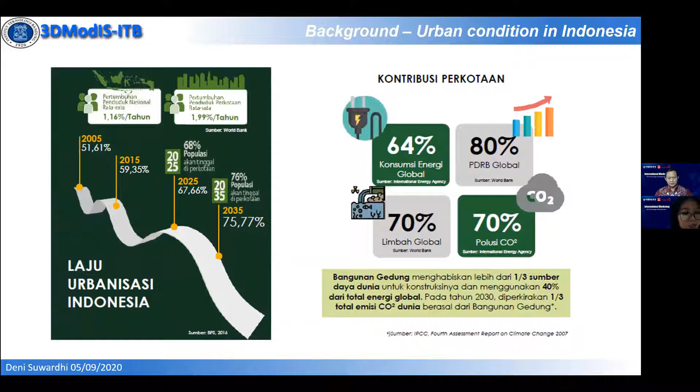Before we go to the HESTYA research project, we have to talk about the background of urban conditions in Indonesia. In urban settings, buildings represent one of the most important elements. Building construction requires more than 40% of global energy requirements. In Indonesia, this has become more evident with the ever-increasing rate of urbanization. We can see in the picture on the left the increasing rate of urbanization in Indonesia. In this regard, a sustainable strategy for city building and planning is very essential.

One of the most important pillars—there are 9 things essential for sustainable urban development, but one of the most important pillars of such a development strategy is the availability of accurate data. Urban management planning includes urban service provision planning in accordance with urban service standards, and planning and setting strategic aspects in urban management.

This includes, but is not limited to, urban zone planning, like the regional spatial plan. In Indonesia we call it RTRW, Rencana Tata Ruang Wilayah, and the detailed spatial plan, Rencana Detail Tata Ruang, as well as zoning regulation, residential area plan, and residential environmental plan.

Now about technology and smart city. As we know, a smart city is a city that takes advantage of advanced digital technology, or information communication technology, to improve city performance. The concept of smart city has been proposed in past experience to help manage these issues. In a sense, the smart city is based on various digital technologies, all used to increase city performance.

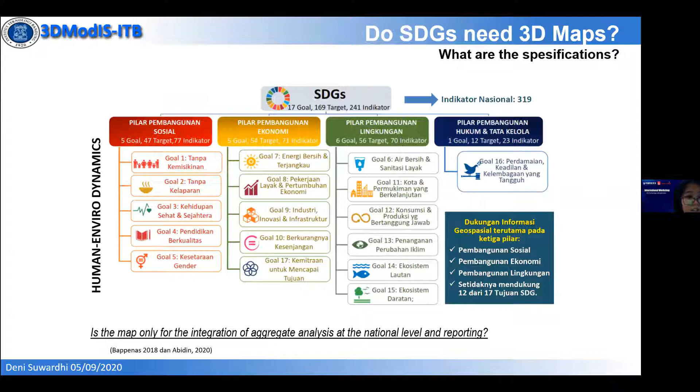We can see from the 17 goals in SDGs, there are national indicators—319 of them.

In this slide we can see the human-enviro dynamics. Here we see SDG 11 is to provide essential urban services, and another target concerns the issue of planning. On the issue of planning, the UN Fundamental Geospatial Data includes not only 2-dimensional, but also 2.5-dimensional and 3-dimensional geospatial data.

We can see this in the document of GGIM.

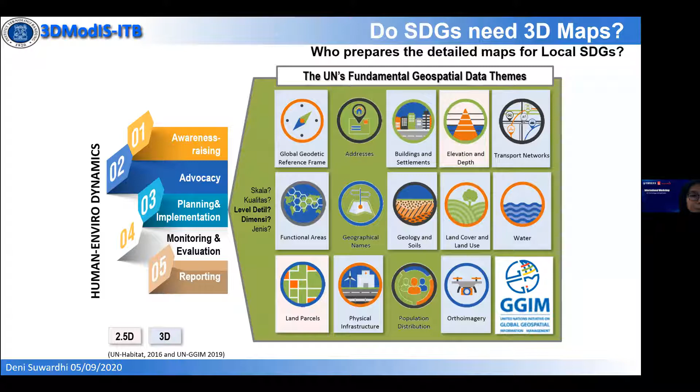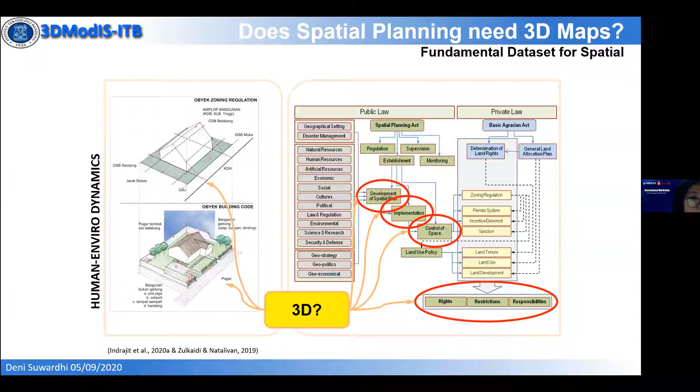Spatial planning needs a 3D map as fundamental data. We can see this in both public law and private law. In public law, there's development of spatial plans and implementation and control of space. In private law, there's need for right restriction and responsibilities with 3D maps, because there's objects like zoning regulation and building codes that need 3D maps.

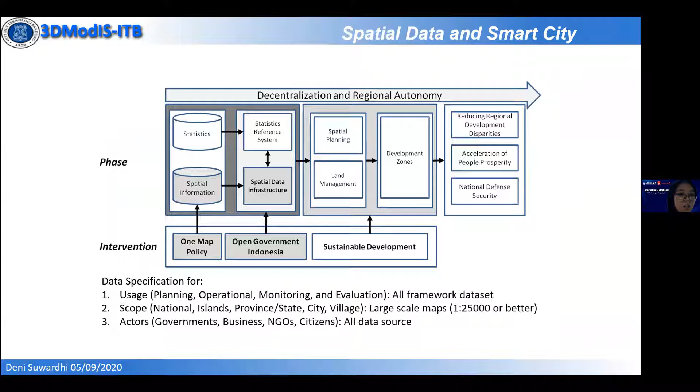It's also more specifically about improving sustainable city planning using 3D data. The data specification for usage, scope, and actors can be seen in the phase and intervention. There's a one-map policy for spatial information and spatial data infrastructure, so decentralization and regional autonomy can be implemented.

From those issues, we have to find solutions. We argue that the recording of 3D geospatial data will become inevitable in the future, as can already be seen in several countries.

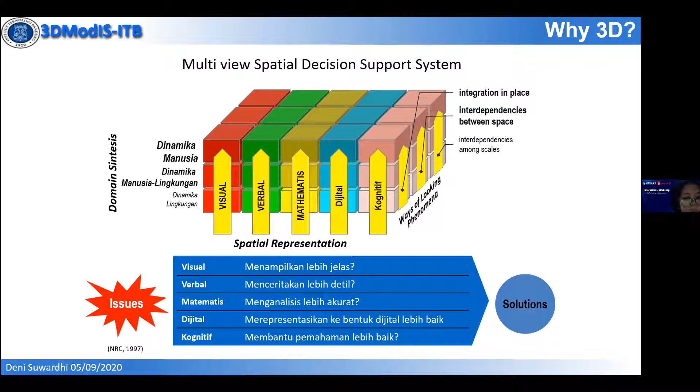With the use of 3D data, standardization to ease business permits can also be initiated. This would streamline the process and thus facilitate business owners dealing with construction permits, getting electricity, registering property, and paying taxes. This is data standardization for ease of doing business.

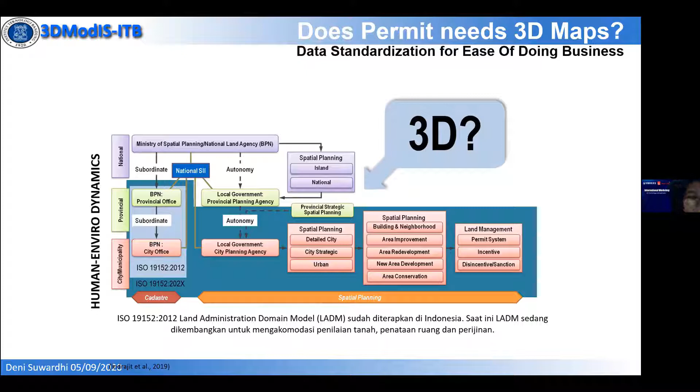Land administration domain model has been implemented in Indonesia, but now LADM is still being developed to accommodate permits, city planning, and management like that with 3D. It's one example of why permits need 3D maps.

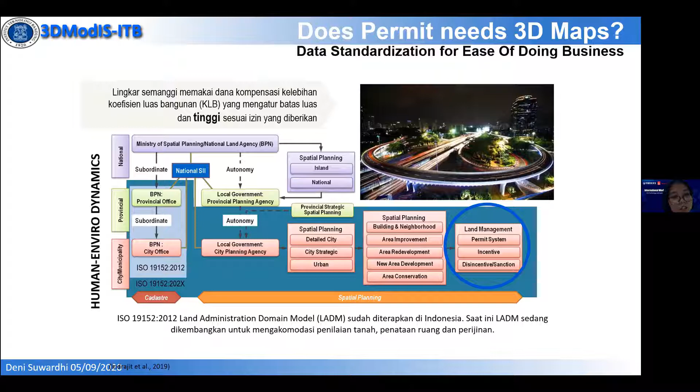It's the Semanggi case in Jakarta, using the compensation fund and using the koefisien luas bangunan (KLB), and then the fund using the regulation about the area and height of building from the regulation.

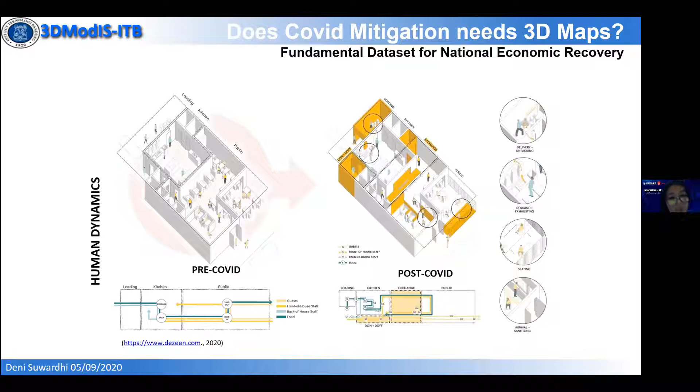This type of spatial planning can be implemented digitally and more efficiently. The left picture is pre-COVID and the right picture is post-COVID. Before COVID, we can see there's no yellow area. The yellow area is the exchange area because of COVID mitigation. It shows pre-COVID, lockdown, and post-COVID.

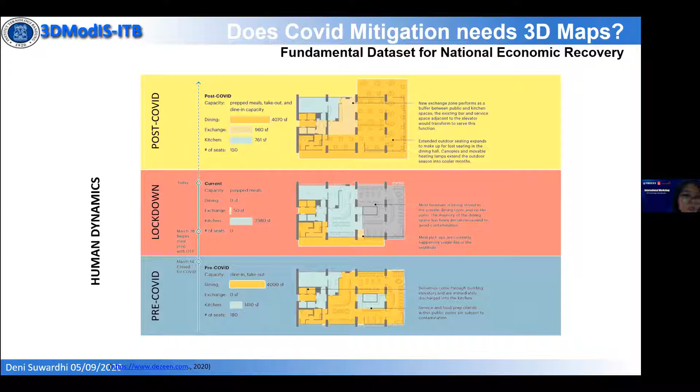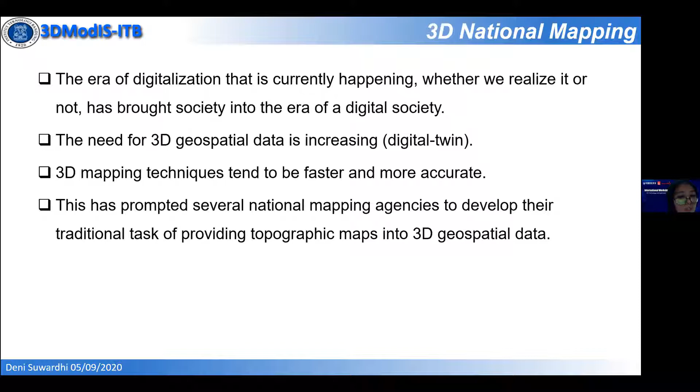In the research from Stoter, it's Switzerland's Federal Office of Topography, SwissTopo.

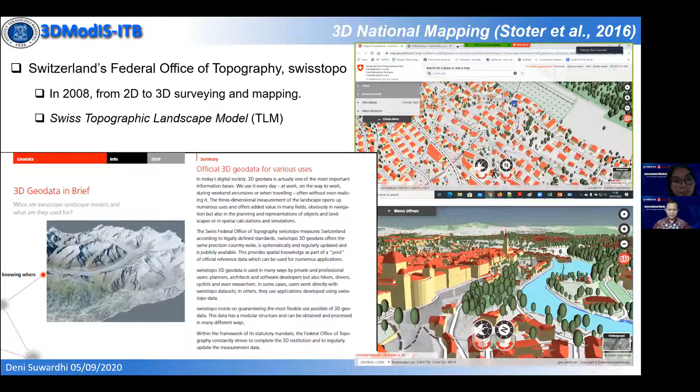Amongst others, the use of laser scanning, photogrammetry, SAR, etc. This is, I would like to tell about the 3D model.

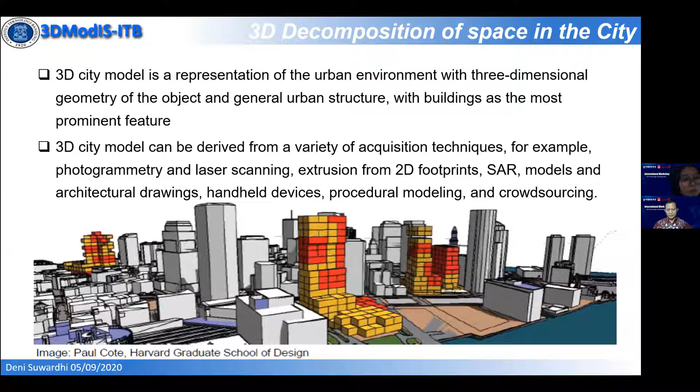It is a representation of the urban environment with three-dimensional geometry, but building as the most prominent feature. A system called GIS, Geographic Information System, enables the storing of both geometric and semantic data in a single environment. The system manages the data and can be used to perform analysis and modeling in 3D GIS, stores and manipulates 3D.

It is a 3D geometric primitive built in GIS software and designed with a specific 3D modeling software. And then one of the standardized frameworks for GIS is the CityGML, City Geography Markup Language, which deconstructs geometrical features into several levels of details.

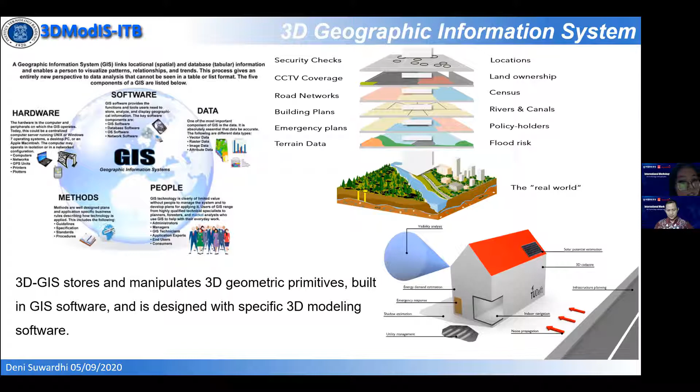It is the level of details in the OGC CityGML and the version of TU-Delft. In the OGC CityGML version, there are the LOD 0, 1, 2, 3, and 4. The difference is in LOD 0, it's only a plan, 2 or 2.5 dimension. And in LOD 1, it's...

visualizing the building mass. And in LOD2, we can see the form of the roof, but it's very simple. And then in LOD3, we can see the more detailed roof. And in LOD4, it's the detail for the interior.

But in the version of TU-Delft, they create another version that's more detailed than OGC CityGML. There are levels like LOD 0.0, 0.1, and so on. It's more detailed.

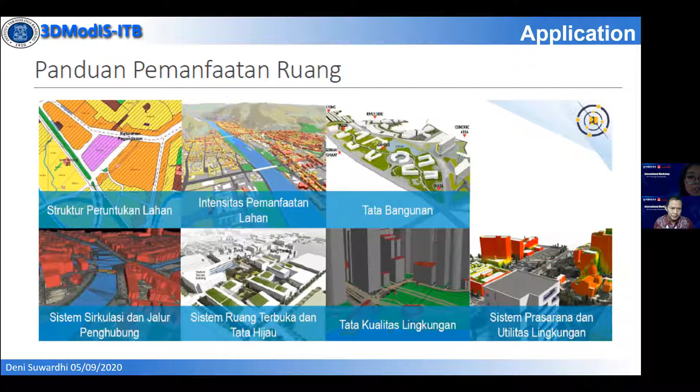And then it is the application from the 3D GIS that we can see from one of the government agencies in Indonesia. And then another paradigm in storing 3D data exists in the form of building information modeling, or we can call it BIM.

Unlike GIS, BIM works at a much smaller scale. As the name suggests, it mainly concerns the scale of a building and its interior. BIM also possesses a standardized framework in the form of the IFC.

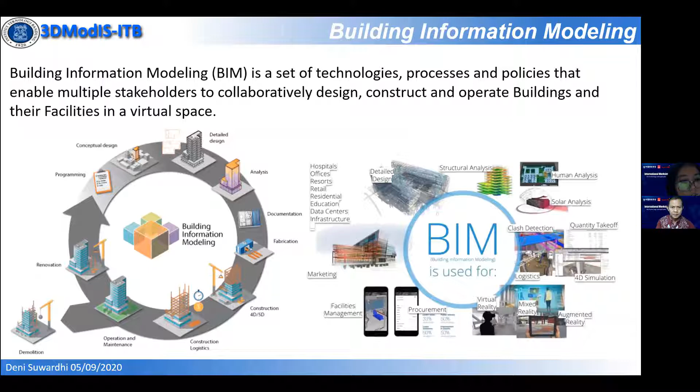In this picture, we can see the process of building life cycle. It needs the building information modeling. And then, what is different between IFC versus CityGML?

We can see the overlaps and gaps. There are differences in coordinate systems, geometry representation, and semantic representation.

CityGML is not very detailed in building, but IFC is very detailed in building, and CityGML can be modeled for a region area, but for IFC, if we model the region area, a larger area, the data becomes very huge and it's not usable.

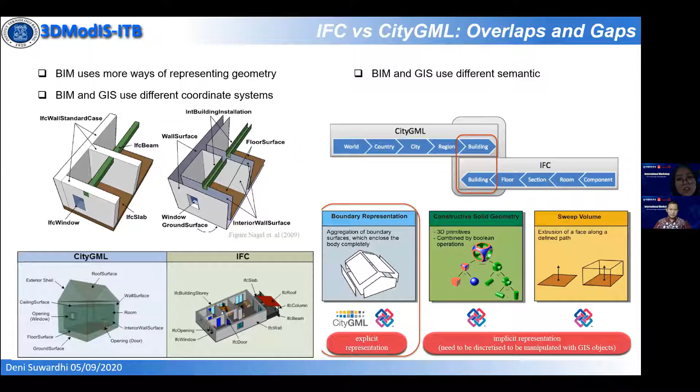This is the case study for the HESTYA, the palaces in Cirebon. Why did we choose Cirebon? Because it is a conservation heritage area.

And then it has varying degrees of architectural complexities as well as being located in an urban setting. And then the third reason is architectural complexity also makes the documentation process more difficult than modern buildings.

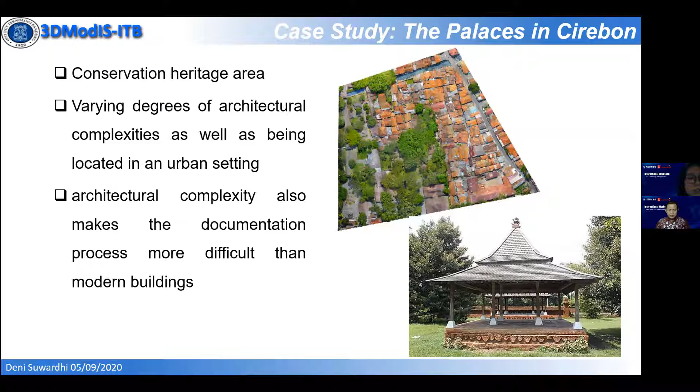And the research purpose is to form a concept for the construction of 3D data models that facilitate the development of sustainable smart city for buildings in urban heritage zones using participatory mapping.

And then the expected results, there are three results. First is a simple 3D digitization method based on SFM photogrammetry and basic surveying, which enables ordinary citizens to perform 3D mapping. We can call it participatory mapping.

And the second result is development of a smart city system, which enables the public and the stakeholders to integrate their data. And then the third is the 3D models obtained from this whole workflow.

In this research, we use CMDBuild. CMDBuild is the application that can manage the city facilities and the data for 3D GIS and building information modeling. It has visualization features in that application too.

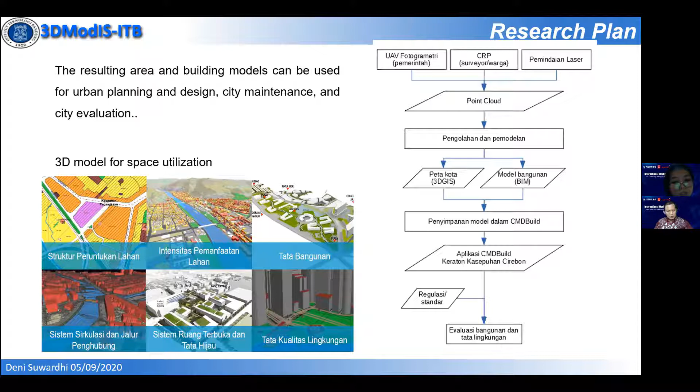We use that application to be the assessment tool for the evaluation of building and environment, and also for land administration and land management.

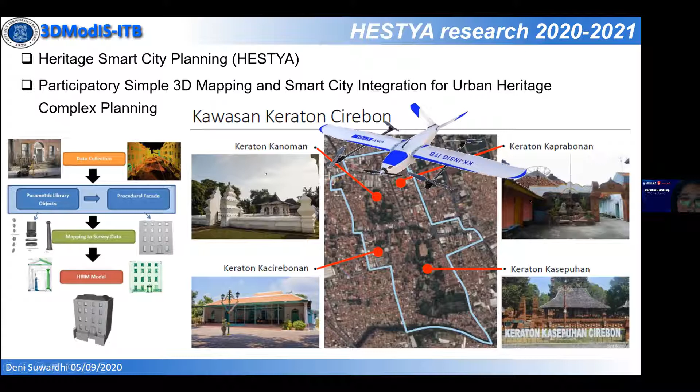In this project, participatory mapping also ensures strong local engagement. This is the map of Cirebon; there are 4 palaces, and in this first year of research, we only mapped Kasepuhan Palace. There are 3 other palaces remaining.

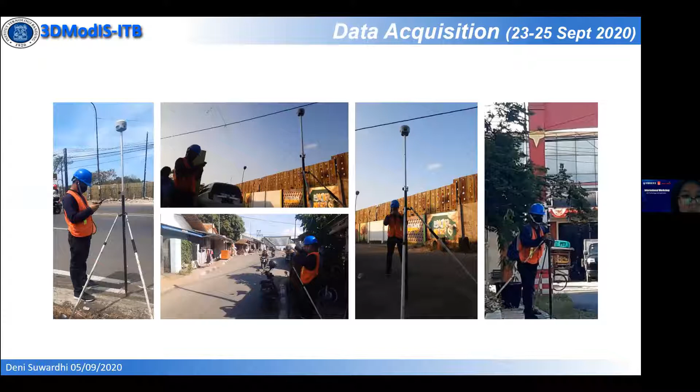Until now, we have done the data acquisition in September, for the buildings. We use the terrestrial laser scanner, the 360 camera, and the GeoSlam handheld laser scanner.

Why do we use GeoSlam? Because using the terrestrial laser scanner, it's too much point data we have to take in one building, but using GeoSlam it's more effective.

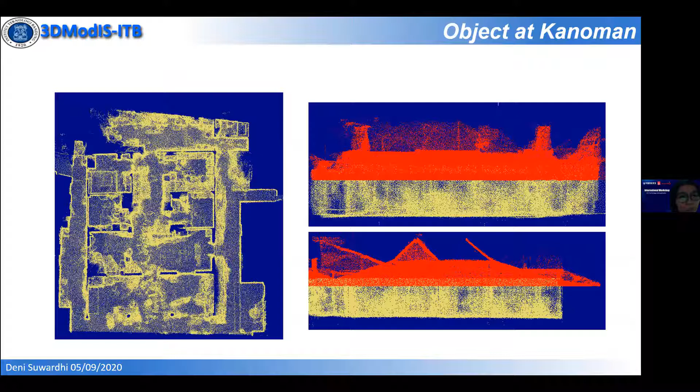It is an object of Kanoman Palace, one object in the palace - it is the house of the prince, a large house. We can see the buildings, the interior, and this is the ground plan.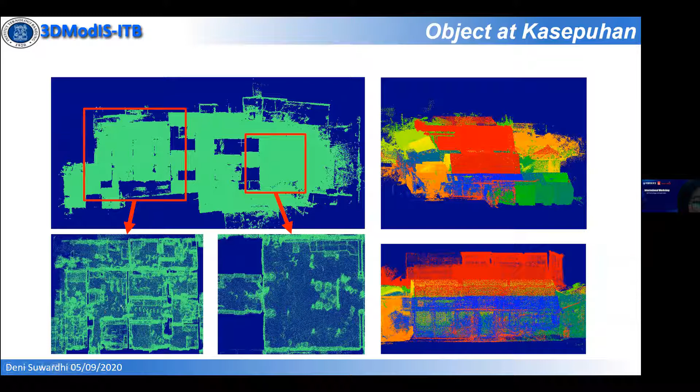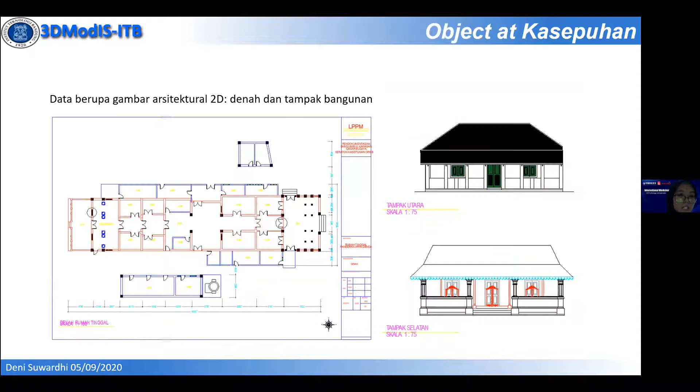Besides using the GeoSlam handheld laser scanner, we use architectural drawings, but only two dimensional - the ground plan and elevation plane for the house, and it is the modeling from this architectural draw data. We have to integrate the point cloud from GeoSlam with the architectural draw to improve this building, but it's still in progress now.

And then it is the base map and thematic map. In this research, we have to see the citizen relations and family, and from that we can see the home location.

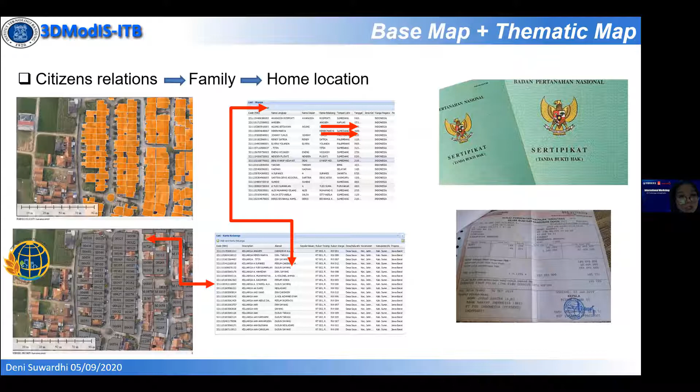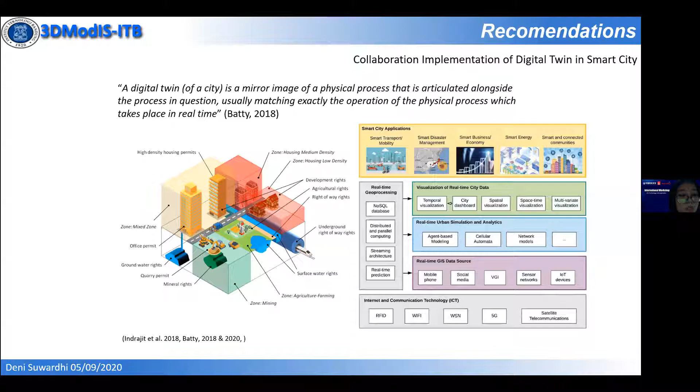Okay, it is the recommendation for the next step: collaboration and implementation of digital twin in smart city. As we know, digital twin is a mirror image of a physical process, usually matching exactly the operation of the physical process which takes place in real time. So the digital twin can be used for smart city applications.

This is the collaboration and implementation of digital twin in smart city, because Indonesia has programs to implement the smart city concept. There are 25 cities for the smart city concept, and we are going toward 100 smart cities in Indonesia.

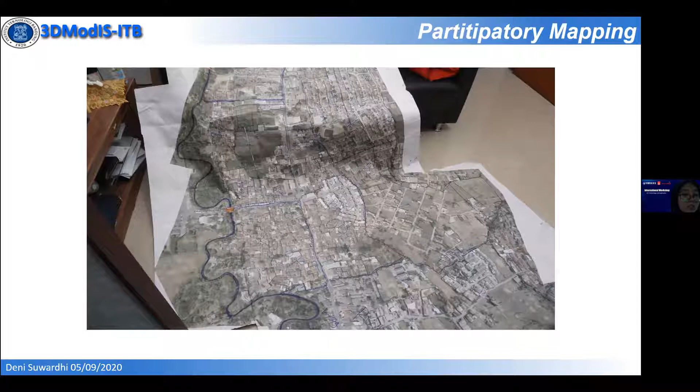In this we can see citizen as a sensor for the participatory mapping, like this. This is one example of participatory mapping, but it's not in Cirebon - it is in our previous research in Jatinangor, Sumedang.

And then we will create a smartphone application for data acquisition on site to support the participatory mapping. This is with LPPM ITB - there is an application called Sapa Diri dan Tetangga, but it's still in progress too.

Yeah, it gives us the location of the citizen's house, and then the citizen can use this application to...

And then it has to be a collaboration in implementing the metadata Perpres One Map and Perpres JIGN, sharing national geospatial information.